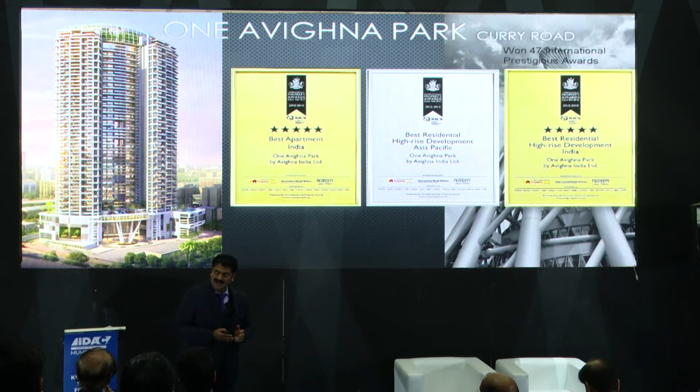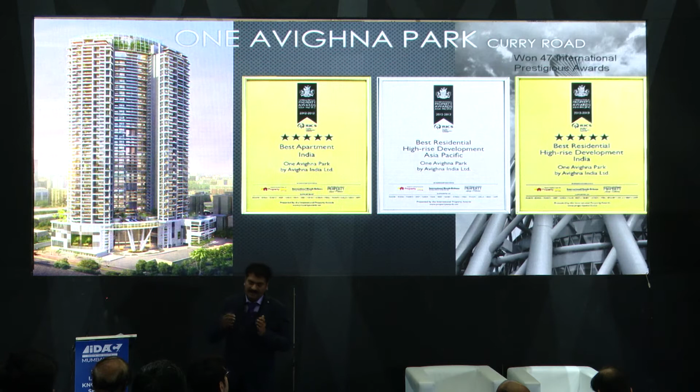Now, what is so special about it? In any residential high-rise building in Mumbai, we have got a central core and we have got apartments. We don't design apartments the way Dubai does. They make a form first, they inject the functional requirements inside the shape, and then the building is ready. It's more of a structural design and facade design than the planning itself. But here my client was very conscious about the planning. We have not compromised on the planning. We have achieved the aesthetics, but not by adding a single element which is redundant.

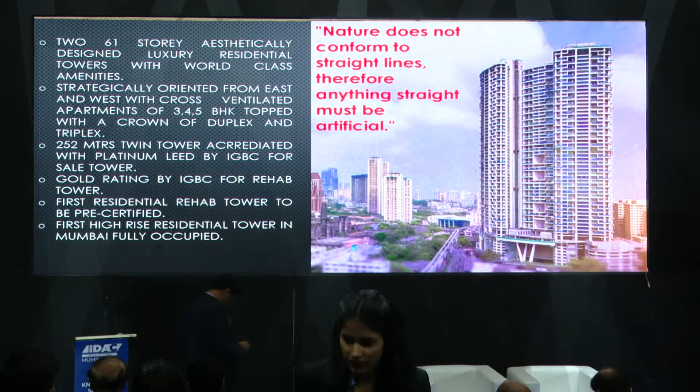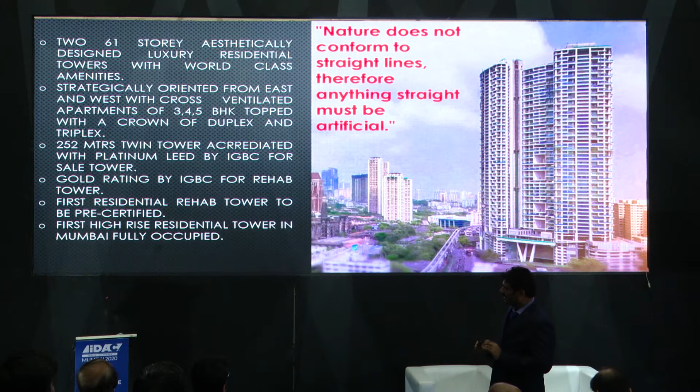So understanding the project first. It's currently the tallest occupied residential building in the city or in the country. 252 meters is the final height, and it has got 3, 4 and 5 bedroom apartments. It was a pre-certified platinum rated building. This is a rehabilitation project, so even for the rehab building, we got a gold rated certification.

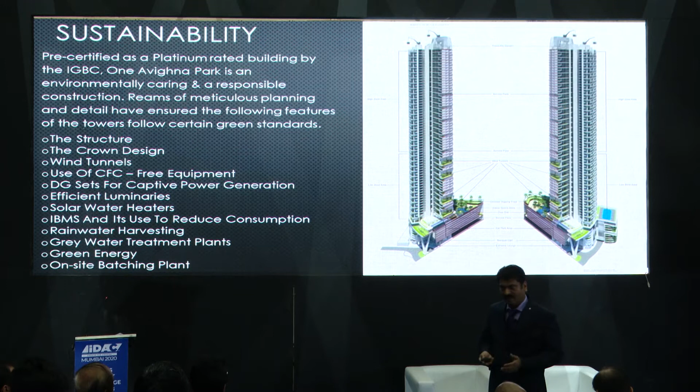Awards I told you about. We have got all sustainability features. I'm just trying to give you the basics of this building because this is a platinum rated building, so all the features of sustainability known to us are already incorporated in the project. And because this is not the current topic, I'm passing through these slides very fast.

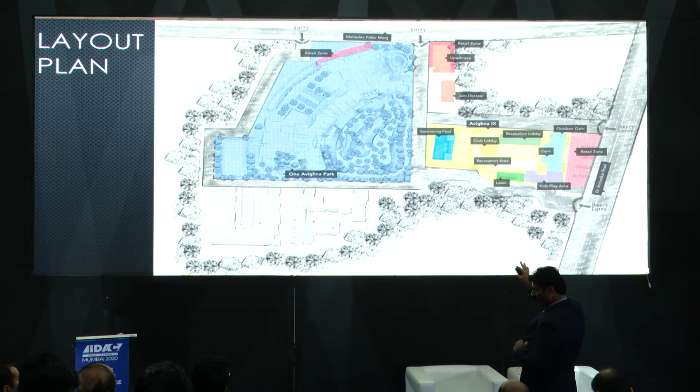This is the layout. I've got the rehabilitation towers on one side. The second phase tower, on the right hand side, is now completed. The main tower which we are going to discuss is the one under that blue footprint, and this is an overview of it.

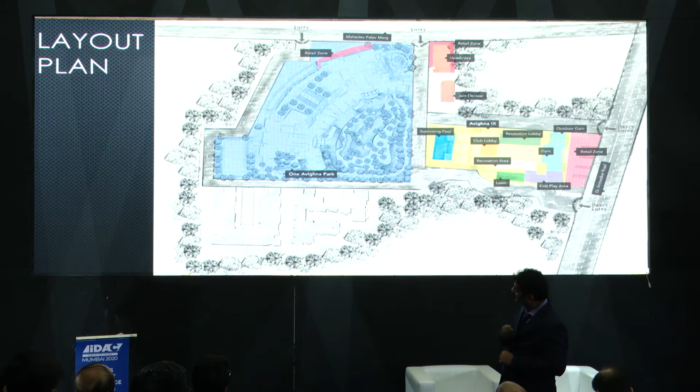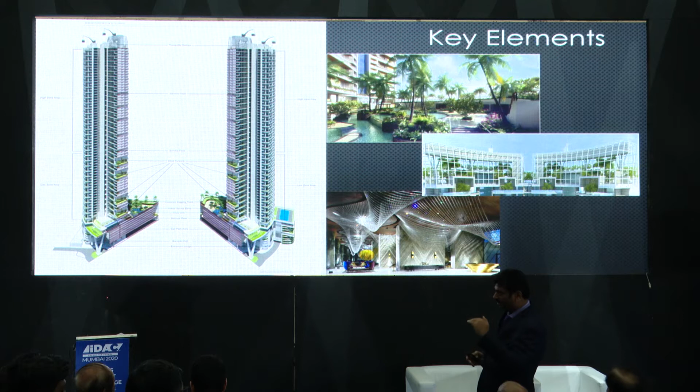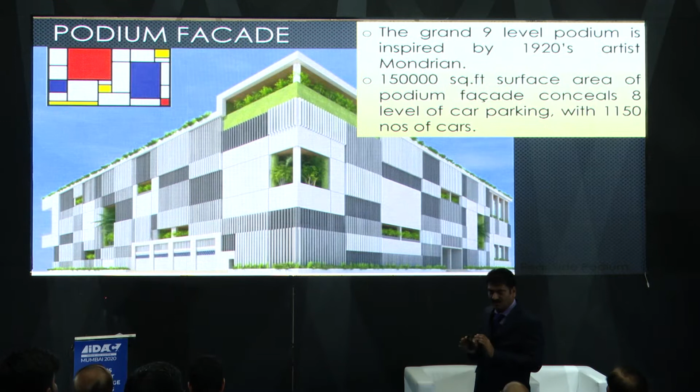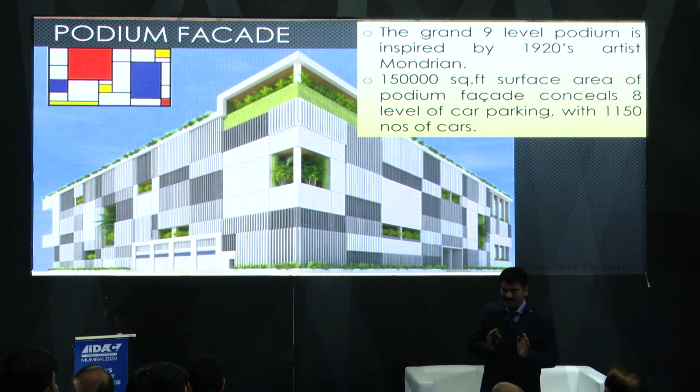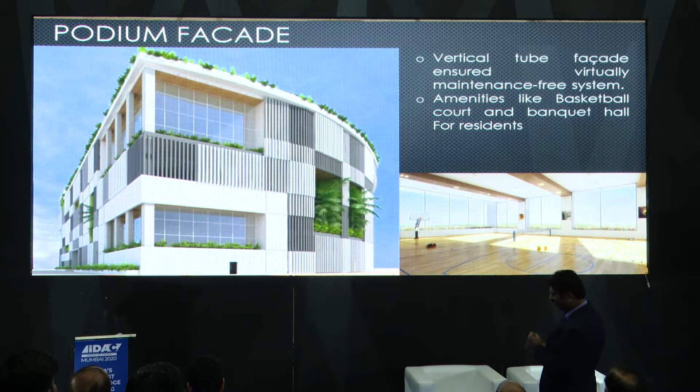The podium facade: we had a big challenge while cladding this facade, because this is almost 10 lakh square feet of parking area. It becomes very bulky and massive, and hiding it behind cladding was a big challenge. So we used a pattern known as Mondrian. And in that facade, we have got a number of amenities, including this multi-purpose hall and a basketball court.

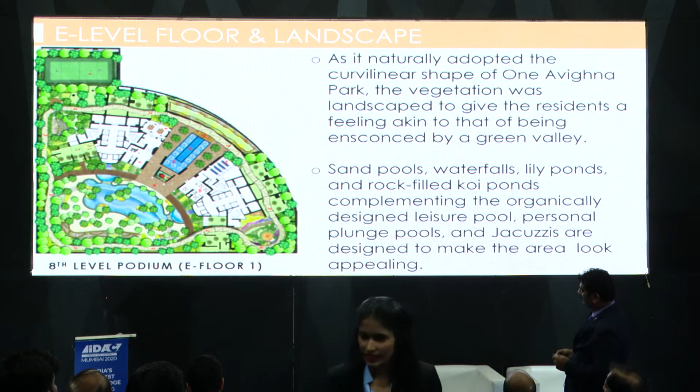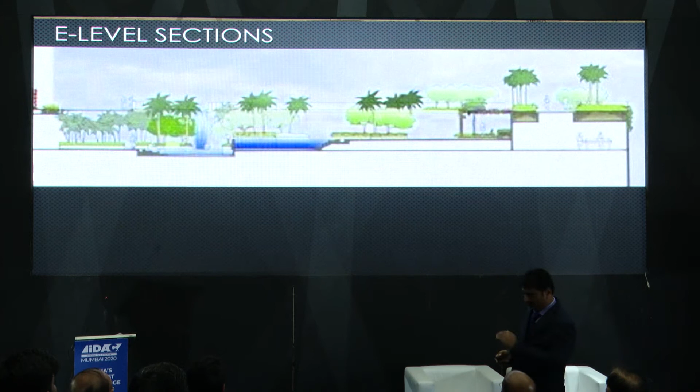This is the basic section where we have got a kind of stepped valley landscape, and we have got different water bodies at different levels. The water flows from the upper level to the lower level and becomes part of the swimming pool as well.

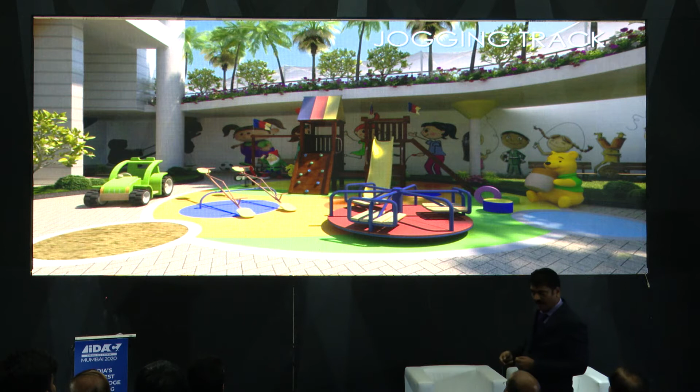A jogging track moves all across the E level and becomes kind of a bridge. In some places it becomes part of the level of that valley type garden.

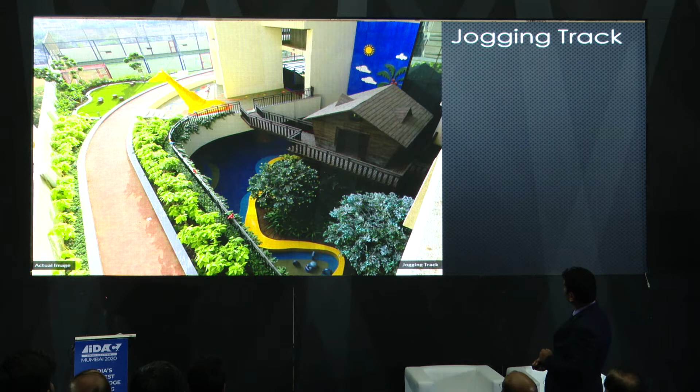This is the actual picture of that jogging track, and from the top, that valley garden, and then we have got different E-deck levels where we have got those gardens for each apartment.

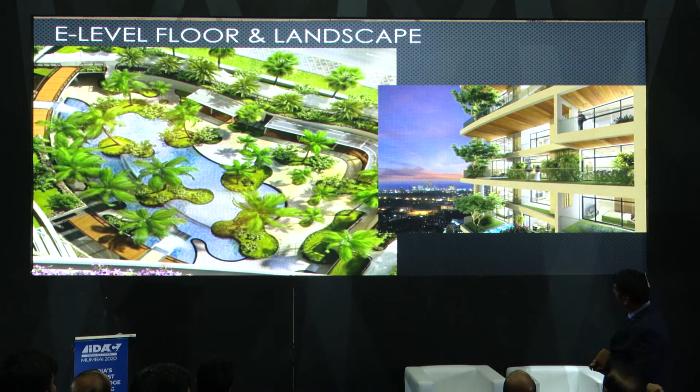This is the actual picture of the swimming pool. On that side, it's a rendering. On this side, it's an actual picture.

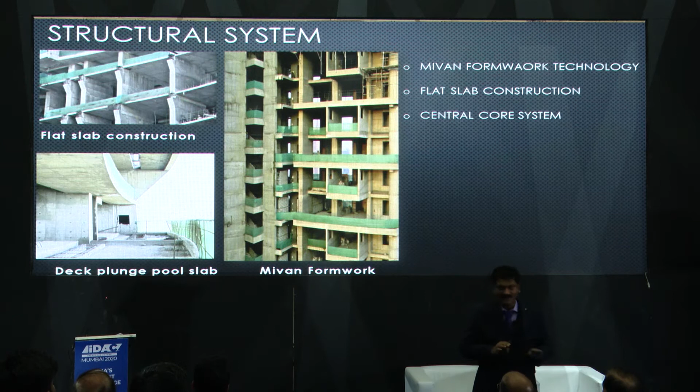Now, the main topic, the structural part of it. So we have got typical flat slab construction, typical Mivan form shuttering, and then we have got those decks with plunge pools. Everything looks very typical. So what's so special about the structural system?

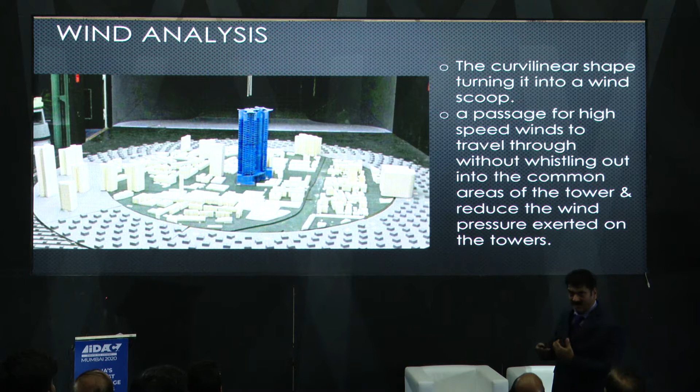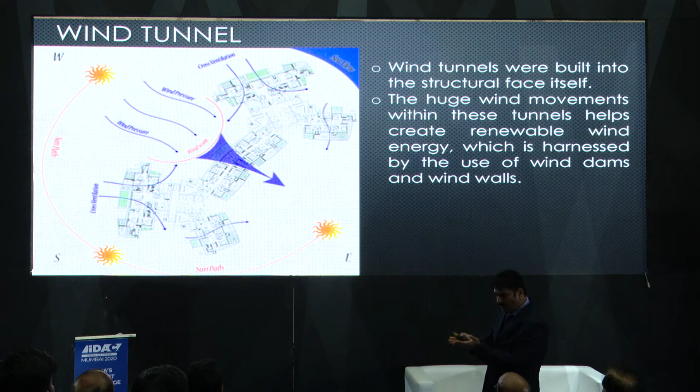We did the wind analysis as usual and tried to find which corners are critical. What we noted is that this form of the building becomes a wind scoop. Premnathji showed one building in China where there's a small gap used for vertical windmills, and we installed these vertical windmills in these 4 tunnels at different levels. So we have got 10 kVA windmills there.

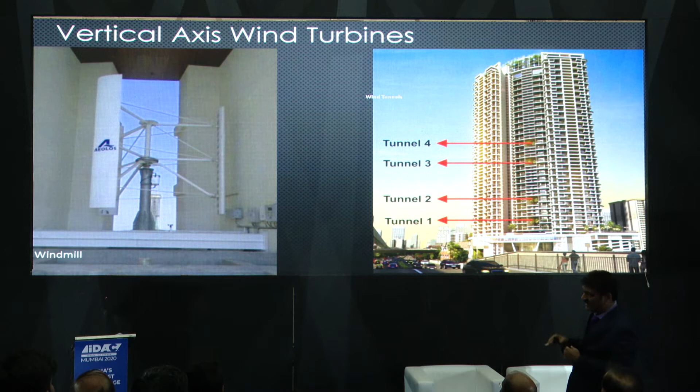This is the actual picture of the building taken from my friend's office, which is in Futura, FutureX I think. So the basic idea is that whatever you see in this building, the aesthetics, people admire a lot, but everything is functional. Every element you see as elevation has got some purpose.

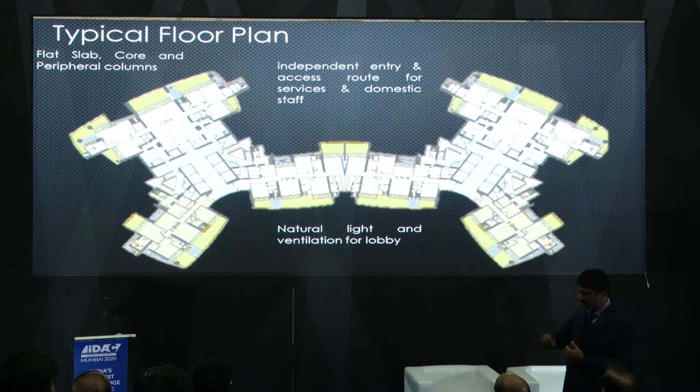Now if you note the elements, we have got these corner columns. This is the first building where you will find most of the structural peripheral columns actually outside the building line. When I say building line, it's an official legal building line in the municipal approval.

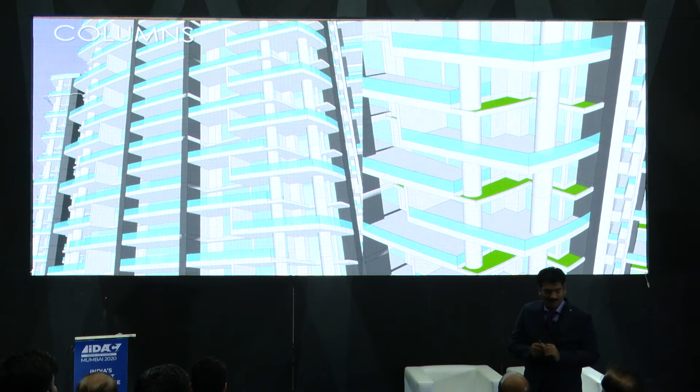My requirement was very specific when I first made this design, and I put the plan to the structural engineers, a team of structural engineers. I had local engineers, I had one foreign structural engineer, and most of them said not possible. So I kept on pressing. Then we discussed, and I said I don't want to add any element, but I want this.

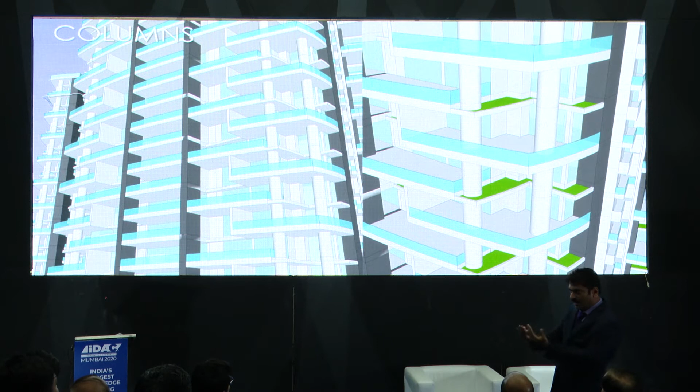So if you see all these peripheral columns, they are outside the building line, and that generates those corner windows. So I don't have columns in the corner. All my corners, like master bedrooms and even the toilets, have got corner windows, and the columns are coming out. The columns are like 1 meter in diameter, right from below to the 61st floor, all across the periphery. You'll find double height columns supporting those double height decks.

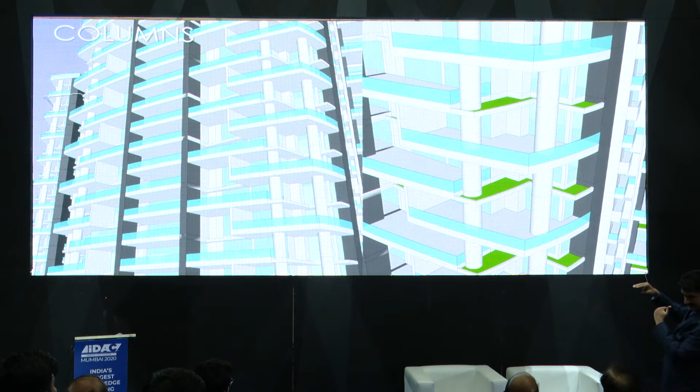I have removed a few of the decks so you can understand exactly where the columns are placed. See the building line which is in the rear, and the columns coming out almost by 12 feet.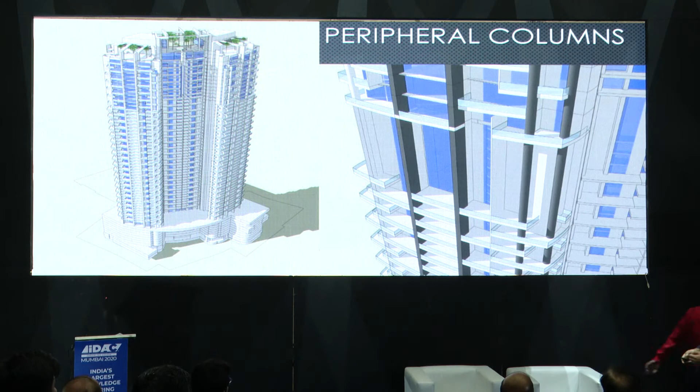If you see the brackets, there are hidden brackets inside this structural system. If you see the plan again, I'll take you to the detailed plan in the next slide, but you will understand the importance of these brackets happening in the middle.

There are these double height decks, so I needed privacy, since from the upper deck level one can look down into the other's apartment. So there should be some barricading. But simultaneously, I wanted this big cantilever, almost 15 feet, to be supported from the column behind. So we have got this one-floor-high bracket jutting from the column, and it supports not only the lower balcony but also the upper deck.

The length of the deck is almost 50 feet. So 50 feet by 15 feet is a big area, a cantilever coming out, so you need a supporting system. Every bracket you will find is supporting some element there, as well as giving privacy. So all across the facade you will find this element. It is a structural element with dual functionality.

So if we take this as one apartment, you can see those round columns in the corner. They are my freestanding columns, coming out of the building line, so that I generate those corner windows. Corner windows give fantastic views inside the bedrooms, and these bedrooms are quite big, so they don't have space constraints.

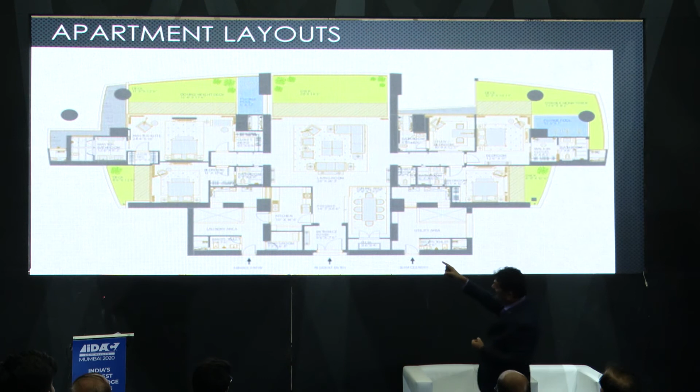On the other side, there are places where I need the support. So somewhere behind that column, there is a bracket coming up, which gives privacy to the lower deck.

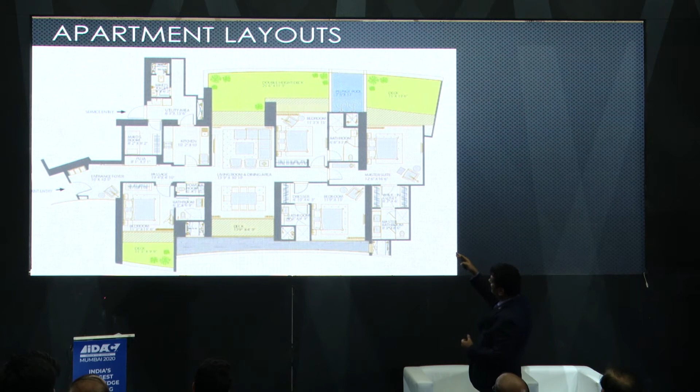Same thing is happening on the corner apartments, where I have the middle apartments. I have the bracket there near the plunge pool, so that the upper deck person cannot look into the plunge pool of the lower deck.

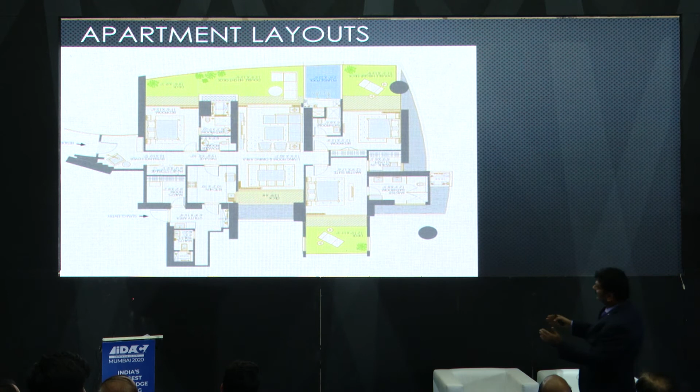This is the corner apartment. You will again find those columns which are outside the building line, and the alternate decks are supported by that corner column, which are my main structural columns.

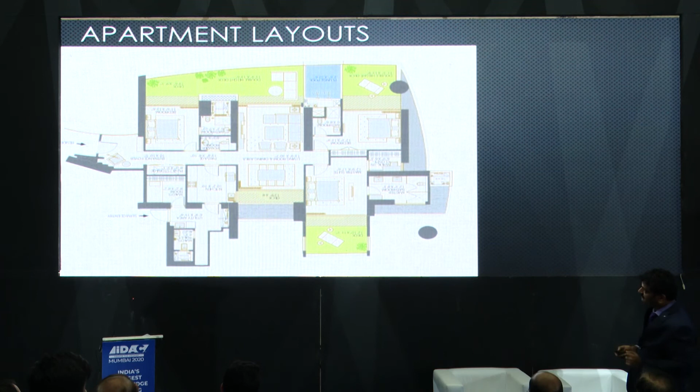One more feature I would like you to note is this huge deck level extension, which is at the 11th floor.

And on the 11th floor, there is a huge 9,000 square feet club area. This is a health club. The total clubhouse of this building is almost 60,000 square feet. So this 9,000 square feet of club is on this overhang portion.

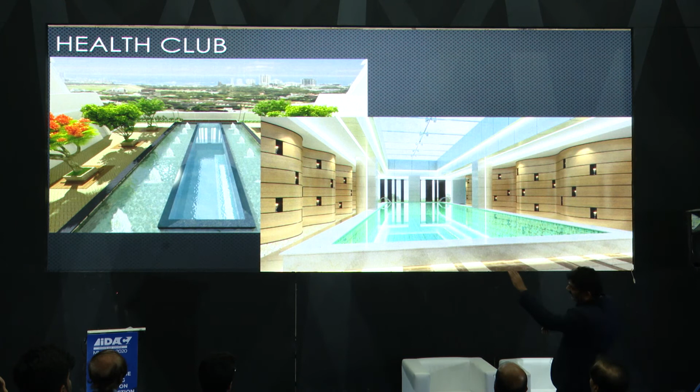Which has a water body on top, a plunge pool in the bottom, and a lap pool at the lower level. So you can see the skylight kind of feature there, which is visible here.

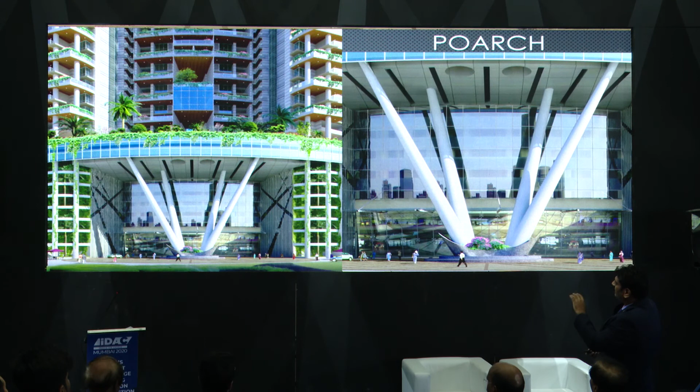And then this whole thing is actually... can I go back? It's coming in the middle there. And this is the health club.

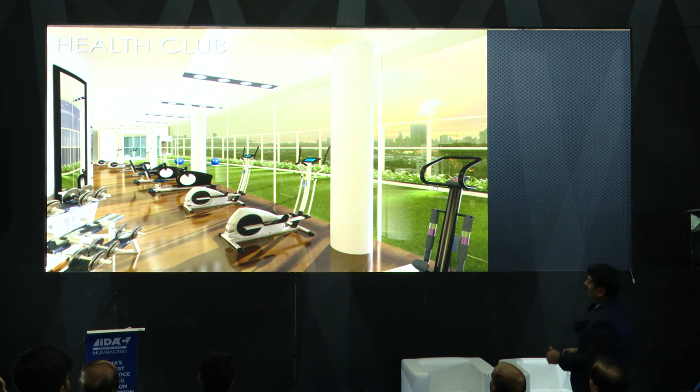Again, there is some extension, a spillover area to the health club for outdoor health activities, and it is overlooking the whole sea line there. Something similar to this.

So I get a fantastic arrival experience below, and my entrance lobby is behind this. So I have almost 12 meters of space all around this tree-shaped column, and you see the shape of that.

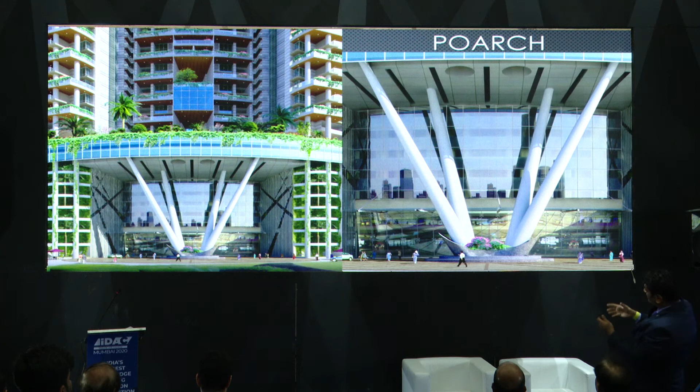It's tapering on the top, and then it is supporting that huge cantilevered, you can say propped cantilever area.

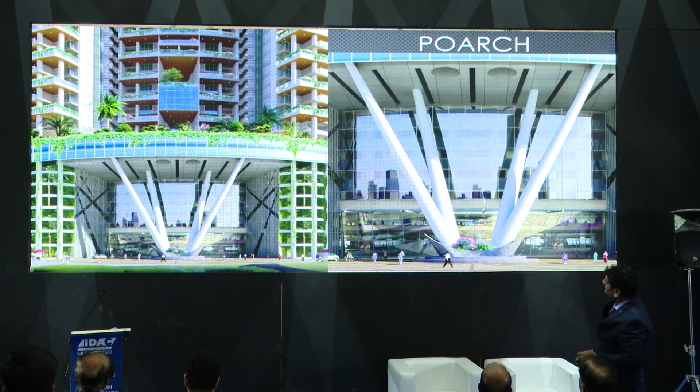These are a few actual pictures. So you can see those tree-like columns and the facade, which is inclined facade.

And then I use the same kind of concept where the columns are outside the building line, because I haven't seen a single building similar to this in Mumbai so far. I don't know whether others have designed something similar, but because this was kind of an invented idea, I thought of copying it myself into my other projects.

So this is another one of my projects. Again similar, but the plan is different. It's a single 50-story tower already at a very advanced stage of construction in Goregaon.

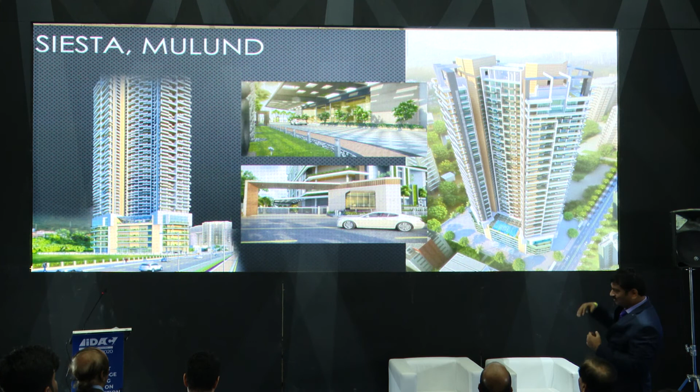One more project where again I have used a similar concept, again at a very advanced stage. It's 18 to 20 stories completed, and this is what the whole idea is.

When we collaborate with the structural engineer on design, not considering structural engineering as a separate part and just giving them the plan - like I'm working with most of the structural engineers here - I give you the plan, and if I tell you put the columns, your office will send me the location of the columns, and that's it. But if you go beyond that, you can generate something which is a really collaborative design.

And there is this one small flick.